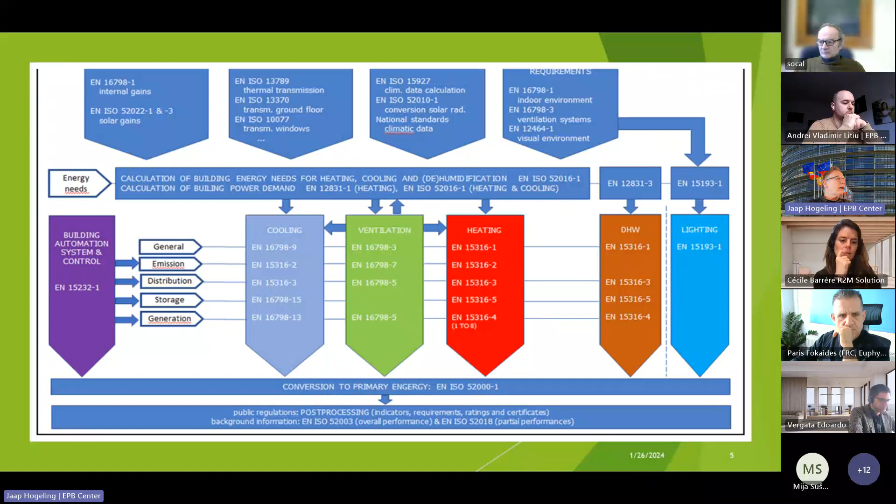Then you calculate according to the overarching standard the primary energy, and then you have the post-processing where the standard EN ISO 52003 plays an important role to describe how it should be looked at - the energy label and the energy certificate of the building.

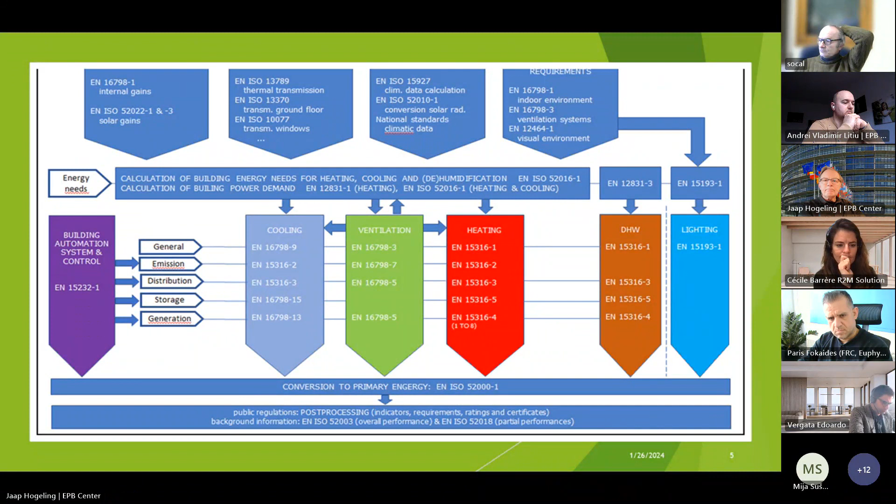Now, I don't see. Okay, yeah.

So the history is that after the EPBD published in 2010, there was further development: cost optimal calculations, and more guidance to ease the process towards nearly zero energy performance of buildings, also introducing the cost optimality procedure by a guideline and regulation from the Commission. That leads to a revised EPBD published in 2018, with more emphasis on cost optimality, NZEB, long-term strategies and smart readiness.

But given the decarbonization goals and the wish to move forward, the Commission decided that this 2018 version should be updated again, leading to the early revision draft in 2021 that will be published now in spring this year.

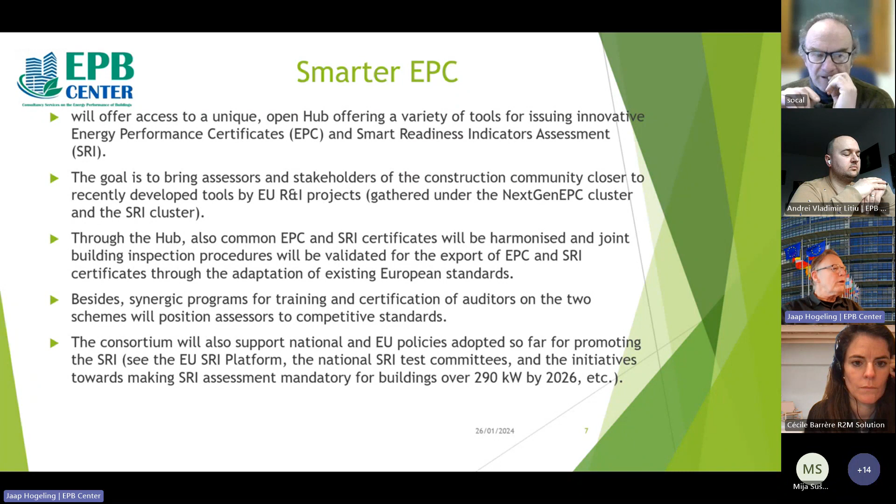The focus is on the energy performance certificate. As I said, in 2010 there were already policy steps towards NZEB and cost optimality, and that was also included in the 2017 standards that were published.

One of the standards is a standard on the energy performance certificate, that is EN 52003-1, and the scope is to set the EPB assessment standards.

The set of EPB standards produces a great number of overall and partial indicators as outputs, and this standard provides general insight to both private parties, public regulators, and all stakeholders involved in this process on how to make use of the outputs for the different purposes.

So it is a post-processing part. The scope describes the relations between the EPB indicators and the requirements and the ratings, and it discusses the importance of project-specific and tailored values as requirement or reference for certain indicators.

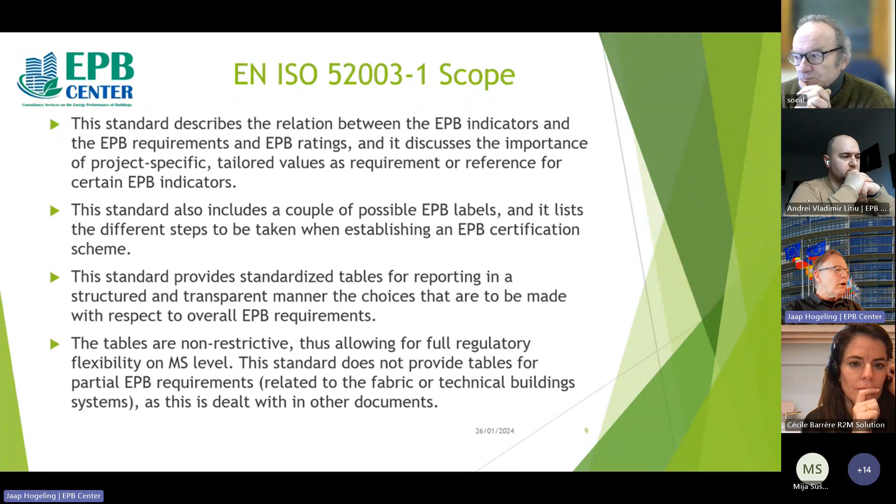It also provides standardized tables for reporting in a transparent manner, but the tables are not restrictive, so it gives you flexibility at member state level on how to make the energy label finally - with the hope that the standard supports harmonization of the energy certificate throughout Europe.

We have to be aware that an energy certificated building requires not only reporting the certificate as such, but also the related input data.

And I give here on this slide a list of input data that should be respected and also put in the database available in connection to the energy label. So you need general data on the type of object, on the building category, on the type of application - why the energy label is produced - and for building permit, for energy audit, for inspection.

The type of assessment - is it calculated, is it measured - and what climate is respected, the outdoor climate and the indoor climate, and details on the assessment tailored for an individual project. You have to report on ventilation, on the overall energy performance, and on the reference size of the object.

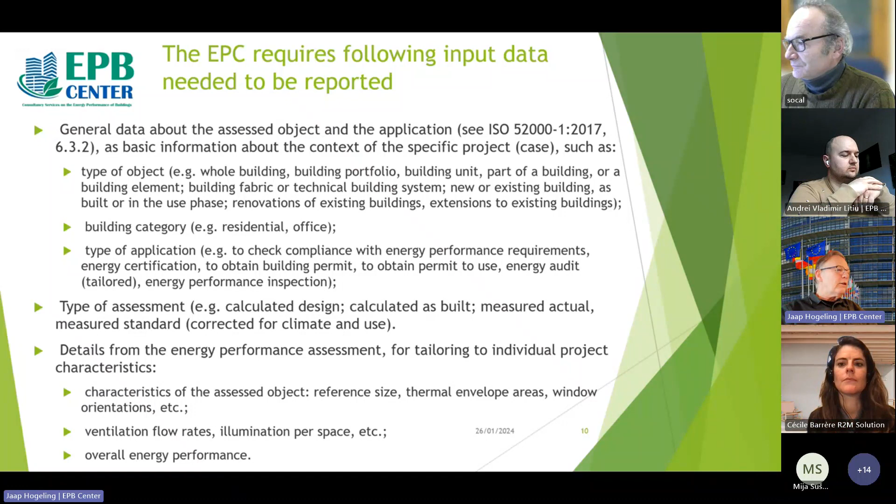If you talk about the assessed object, the building or part of the building or the portfolio of buildings is the object, and you have to be aware that the assessed object comprises all spaces and technical systems. You have to describe this in detail in the database.

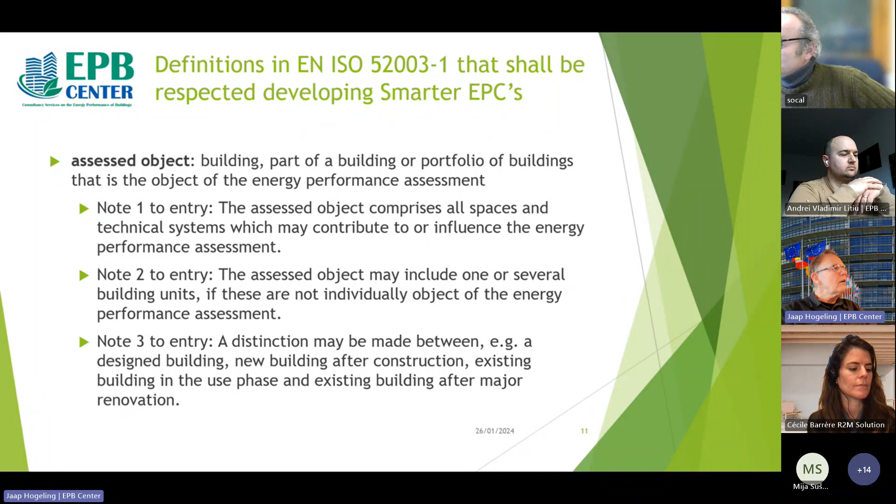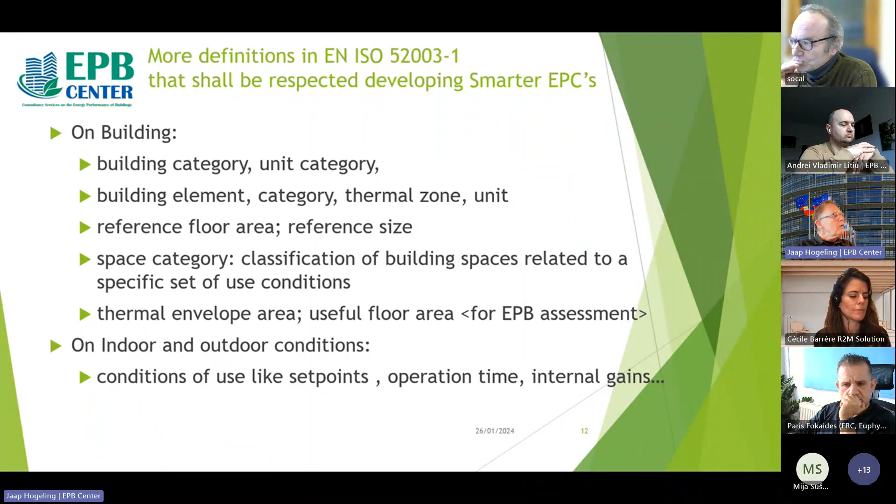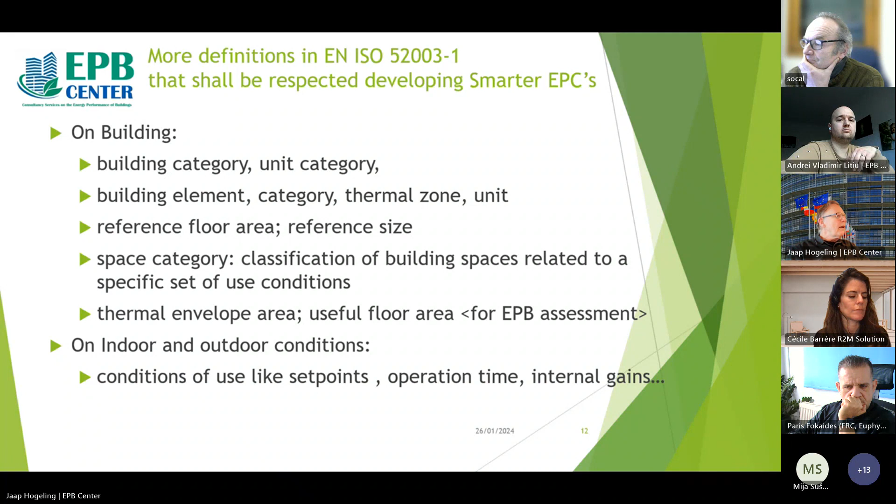There are many definitions in 52003. I just show them here. You have to give clear information about the category, the building elements, the reference floor area, the reference size of the building, because square meters are an important parameter in the energy performance declaration. The space categories are generally very important if you look at the indoor environmental conditions, which have an impact on the energy use. The thermal envelope area, and of course the indoor and outdoor conditions.

Regarding the energy performance, you have to state: is it as built, is it measured, is it calculated, is it a design value, is it a rating on a requirement, or is it a certificate? Are there measured energy values? Is it a numerical indicator of primary energy use? Is the primary energy use per reference floor area, and which is the reference floor area? And do you talk about standard EP or tailored?

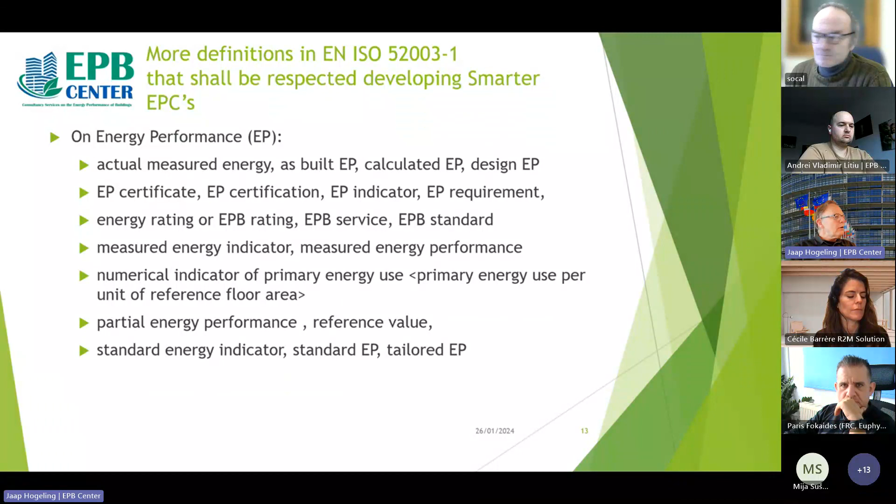Some of the changes in the EPBD that was published in 2010, and also later in 2018, were influenced by delegated acts, and that will again be the case after the publication of the third version of the EPBD this year.

So in the following slides I will give some expectations. As we know, the EPBD is developed because of the Green Deal and other policy papers from the Commission. We have to optimize the building and the system. Energy efficiency first is still the starting point. Decarbonization of the energy carrier and the production of on-site renewables, and the focus on zero energy buildings moves to zero carbon buildings. This is something Laurent Socal will later give more details on.

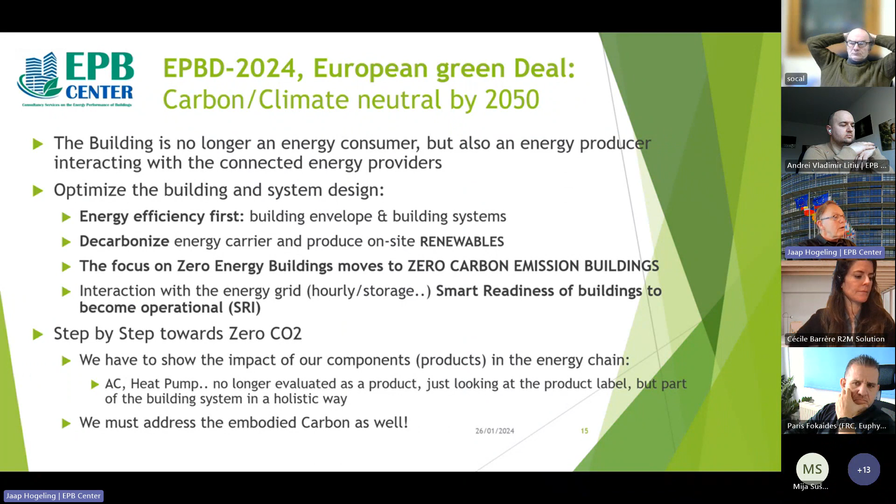And the interaction with the energy grid - is it on an hourly basis, is storage taken into account, and how does the Smart Readiness Indicator play a role in this. Finally, this step slowly during the coming years moves towards zero buildings, zero carbon buildings. And finally, we have to address embodied carbon as well in the near future.

The main new outcome is zero emission buildings and deep renovation programs. So the energy certificate should also indicate how major renovations are expected in the near future, and how it will impact the energy performance of the building. We also have to address the minimum energy performance standards that have to be set on member state level. We hope with this approach that member states will use a harmonized EPC scale.

Hourly calculations are mentioned, but not an obligation. But we see from our side as standard developers that it is essential if we want to decarbonize the buildings.

You could say that non-residential zero emission buildings have to be equipped with control devices to regulate the indoor air quality. Inspections is an issue, and also the certificate, the energy label, is an important instrument to realize the national building renovation plans.

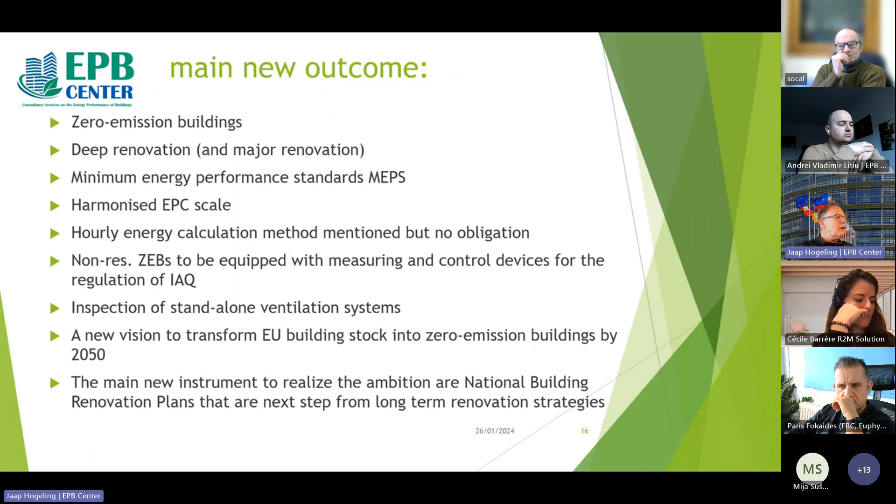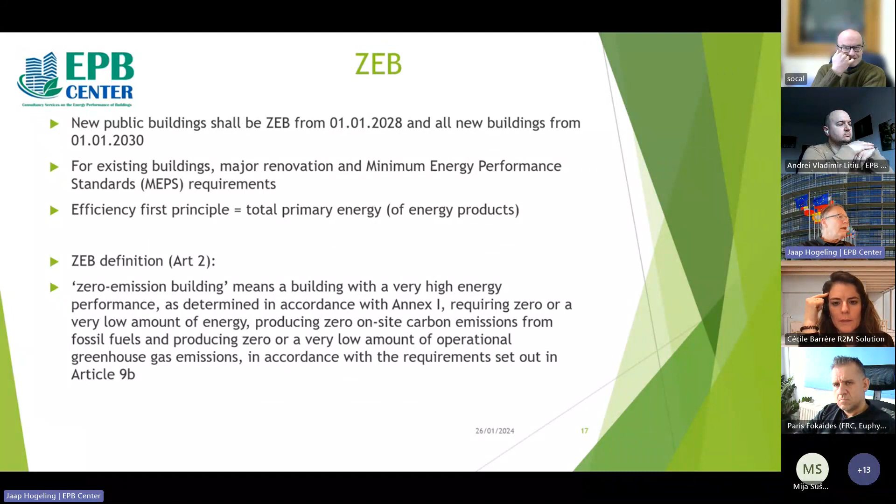These are the requirements in the EPBD on the MEPS and the zero emission buildings, and here the zero emission building definition is given - Laurent will give more information on that. The same in Article 9b, on how the operational thresholds should be considered. A zero emission building shall offer the capacity to react to external signals, so grid interaction, and adapt its energy use, and generation or storage should play a role where economically and technically feasible.

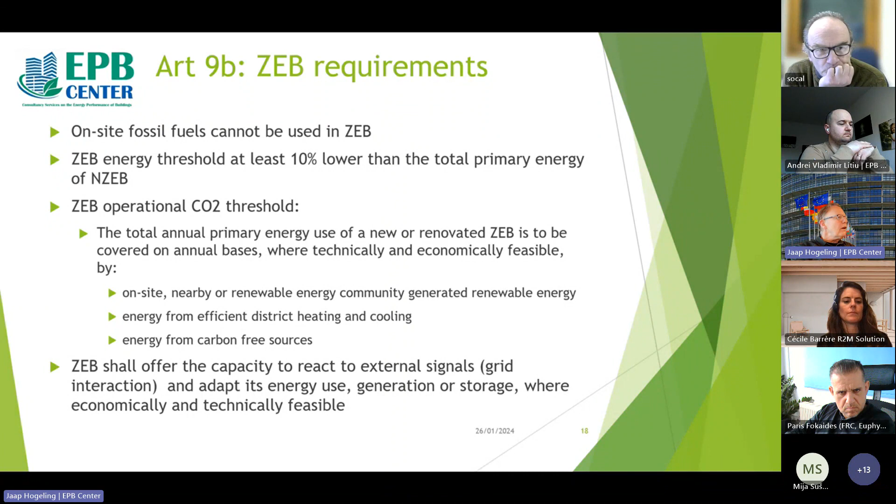That may also have an impact on the energy label and the Smart Readiness Indicator. It is possible to calculate the energy performance value based on total primary energy from delivered energy to the building site, resulting in the same calculation for both non-renewable total primary energy and operational CO2.

But there are different factors, and if you read the EPBD, we have a challenge - we have to, in the coming period, look at our standards, especially the overarching standard, to make the definitions more precise and come to a correct interpretation of the EPBD.

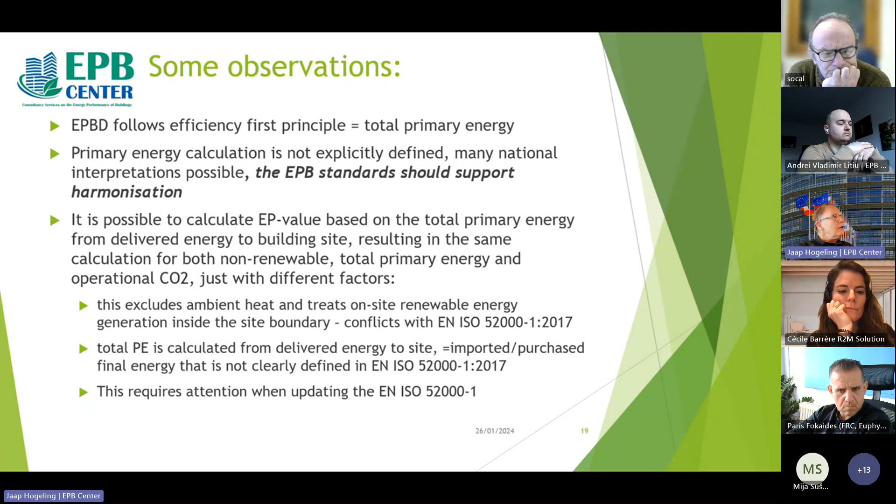Grid interaction, I already mentioned it. It is very important to see how we can also include that in the information on the energy label, because it will impact the outcome of your assessment. It will make a difference if you can really apply grid interaction for your building or not. We will see how this has to be worked out in detail.

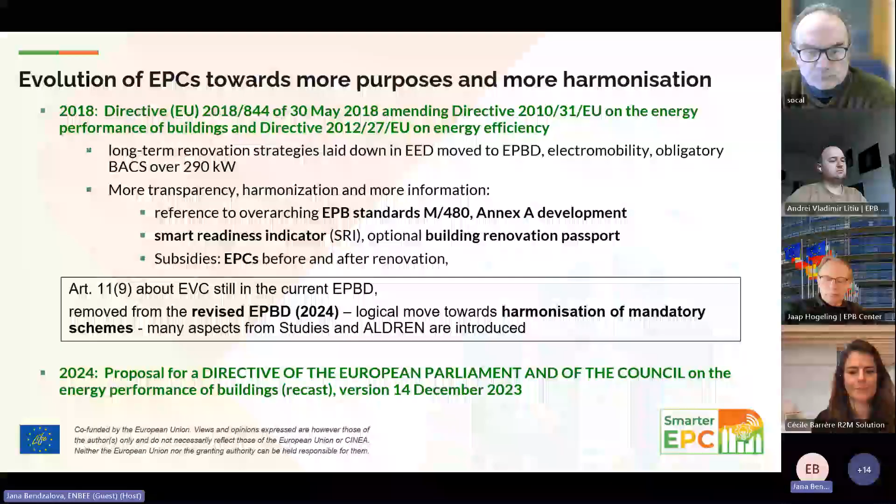So there will be our obligation to implement new directives that I believe is more transparent and harmonized and provides comparable results around Europe.

So I will say now about two projects. It is ALDREN and EPC Recast, which developed several tools that could be perhaps interesting for a Smarter EPC project, because I understand that it will also make link to existing tools and development. So ALDREN, as I said, it was based on voluntary certification scheme, the idea. So 8 European partners worked on this project.

And the aim was to provide transparent, consistent, common European-wide assessment framework to trigger more ambitious renovation and support for common language, EPBD articles implementation, and provide some technical tools and methodologies for implementation of these articles. And so it provides some improved metrics, decision support protocols and tools.

And what was a very important part of ALDREN was that there was an ALDREN Alliance, which was a group of stakeholders, because we tried to find some common language between energy performance and different market actors like financing institutions, asset valuations, comfort and indoor air quality. So there are four main modules or tools in ALDREN.

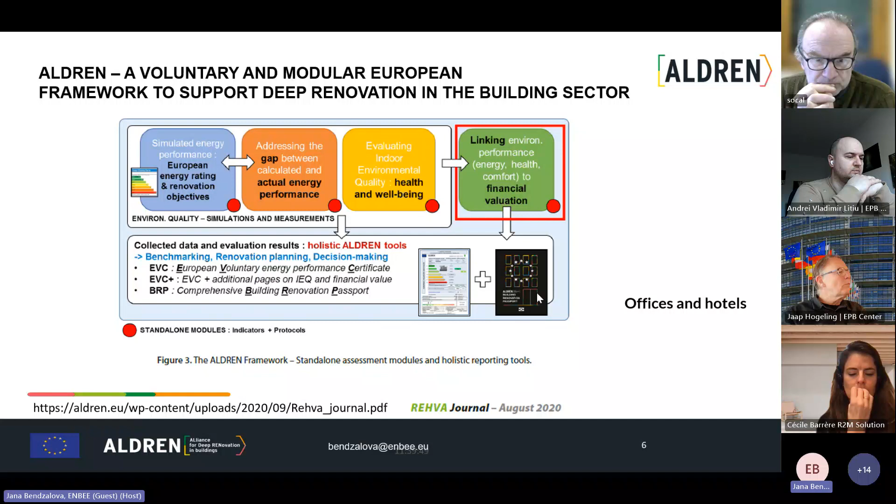And the main outcomes from these modules are energy performance certificate and building renovation passport. So we focus on certificate today because it could be separate presentation about each of these modules. So about the certificate, in ALDREN already were all indicators that are now proposed in revised EPBD.

So there was main indicator, it was non-renewable primary energy at the time, but it contained all indicators that could be useful for some institution, for example, for European green taxonomy and so on. So it included also total primary energy, energy needs, final energy, thermal comfort. It also included measured energy corrected to standard climate and use.

And we had several meetings with existing voluntary certification schemes and also with Level(s) to really provide all indicators that could be used by them, and not only one main indicator that could be decision by member states that energy class will be based on it, but it should provide also other information.

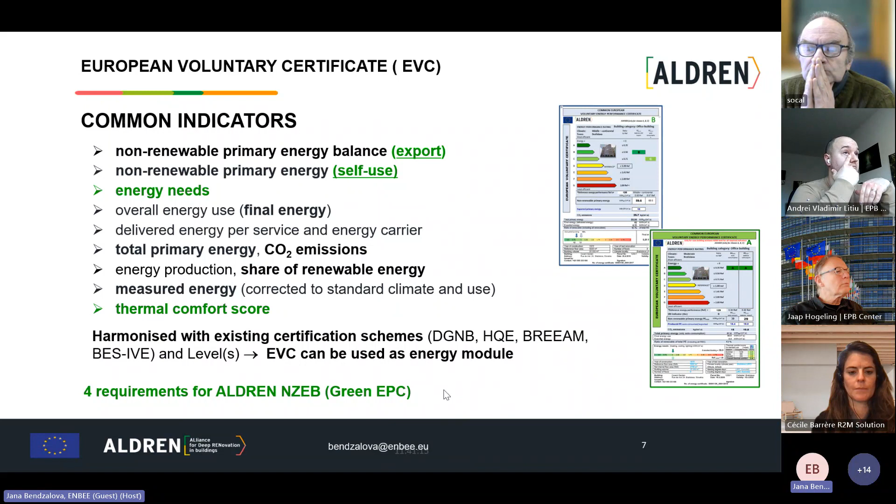There is a common scale, which is now option 2 in European standards that Jaap mentioned. And we also calculated several reference buildings to estimate values for 3 climates. So we made hourly simulations and defined scale for 3 climates. And what is important, we propose that calculations should be for climate of building location, and we recommend to use Joint Research Centre typical meteorological year.

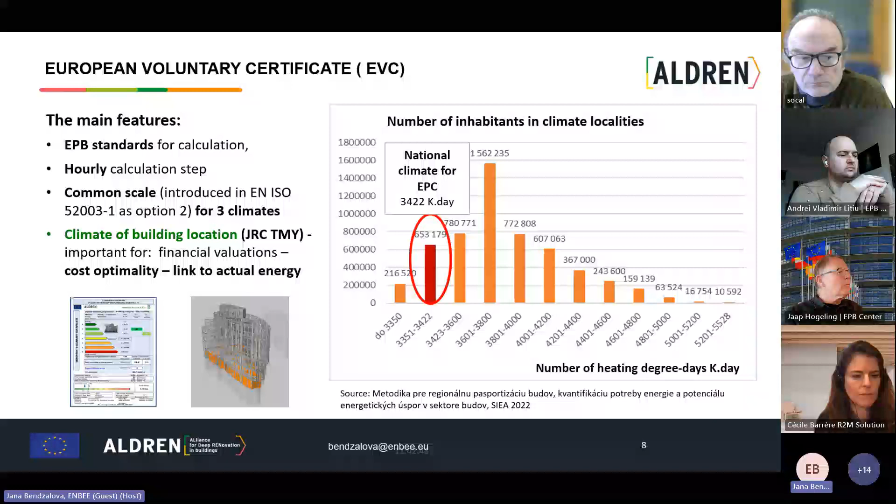And these additional pages include indoor air quality, SRI, financial valuation, risk assessment, and measured energy as a separate reporting page. You can find more about all these modules in the REHVA Journal, because there was a special issue about ALDREN, and I think all these tools are quite well described in this journal.

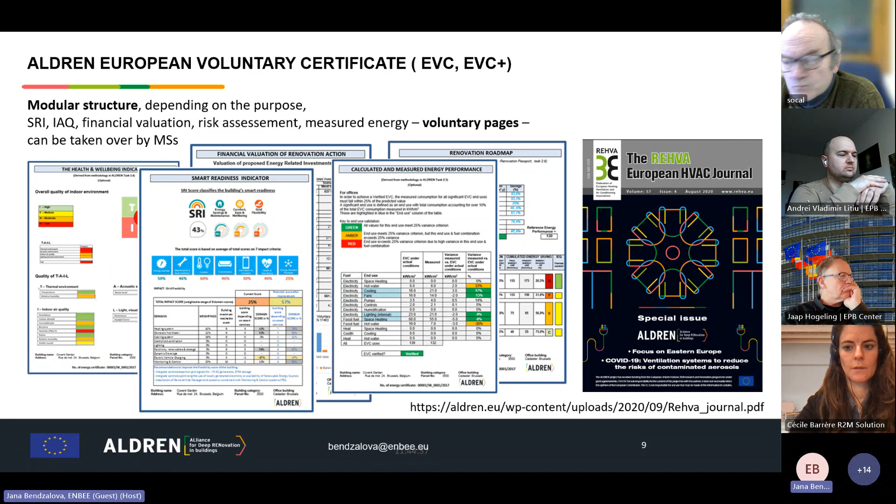So there is a consistency check, data cross-checking during calculations, and comparison with measured energy consumption. It is energy performance model calibration or verification of calculation. And there is also a very important tool, a renovation roadmap.

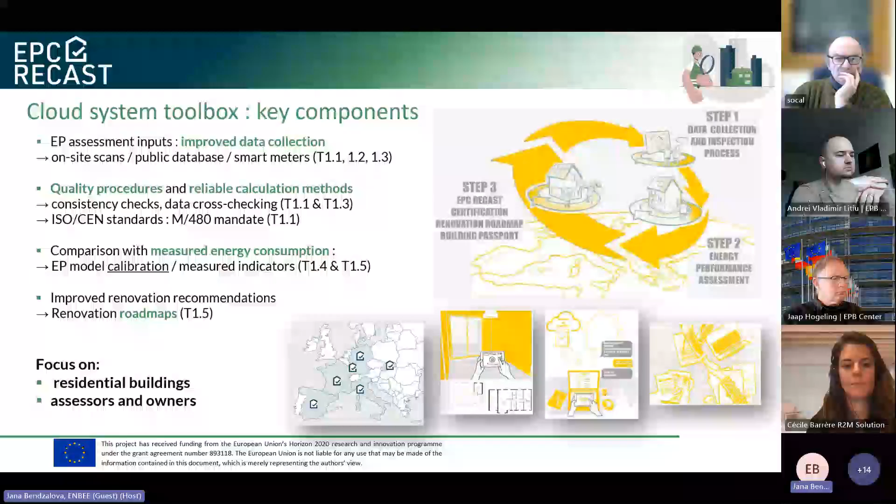ALDREN was focused on hotels and office buildings, and EPC RECAST is focused on residential buildings, and not only on owners, but also on assessors. So we try to help assessors to collect data and to evaluate the building. In this cloud system toolbox, you can find, for example, a link to a tool for scanning the geometry of the building and so on. I must say that not all tools are free, because this is an innovation action and some of them are commercial.

What is very interesting in EPC RECAST is that there is also long-term monitoring of several pilot buildings. So we will have a huge amount of data to compare calculated energy and really measured energy. You can find more on this website about EPC RECAST.

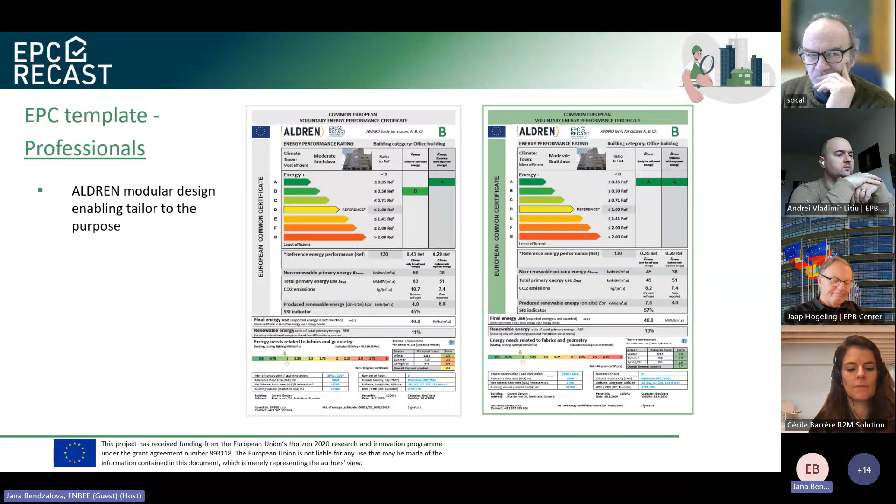About the EPC template in EPC RECAST, we recommend the ALDREN modular design for professionals, but we also developed an owner-tenant EPC, where we try to provide information that is an obligation in the EPBD, including the last version. So it is a template in line with the new EPBD. And we try to motivate the owner to renovate. It is split into the left side, which is the current state, and after renovation on the right side.

Important is that we report all options for key performance indicators for different purposes, so that it also fits the European taxonomy, because the main problem for banks implementing taxonomy is that they have to report energy savings and portfolio performance in total primary energy, but many member states have only non-renewable primary energy as an indicator, including Slovakia. So in these EPCs, they should find all indicators. There is also global warming potential.

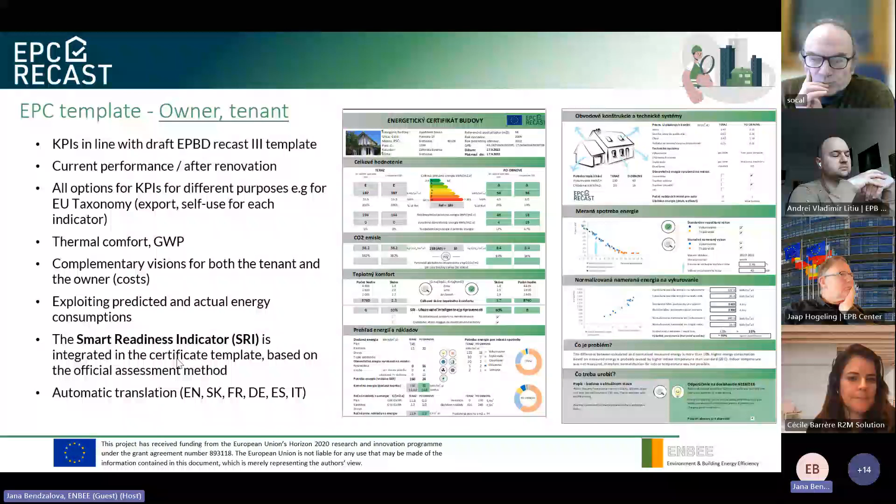In the grant agreement, we had to provide a complementary view for the tenant and the owner, different views. So there is a part about costs. Global costs are more for the owner, and operational costs are more for the tenant. The Smart Readiness Indicator is also reported, but only the result, because we have in the consortium also someone who is an expert on Smart Readiness Indicators. They provided us training, and we recommend using the official tool, but then reporting in the EPC.

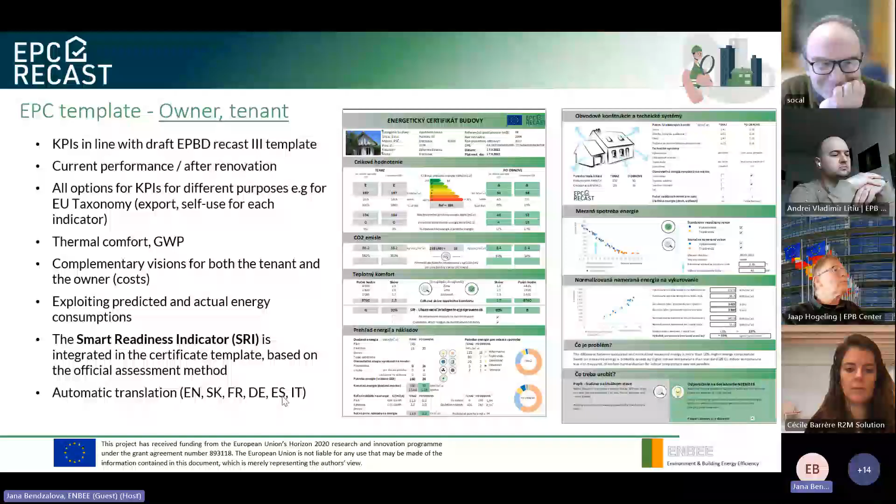It is in Excel, and automatic translation is possible. I apologize, because when I made the print screen, I see that I took Slovak, because it's easy to switch. In the final version, I will put the English version of the EPC.

What is very important, and what I think should always be in each national EPC, is an annex where all the choices for calculation of performance indicators are clear. It is needed not only for transparency and comparability for the Commission or for banks, but also for understanding by the owner, because he should know what is included, if exported PV is counted or not, if ambient heat from the heat pump is counted or not, because I cannot imagine how he can use some value without knowing all this.

So we propose an Excel table with pre-selected answers, because they should be in line with the standards' options and with the options that are used at national level.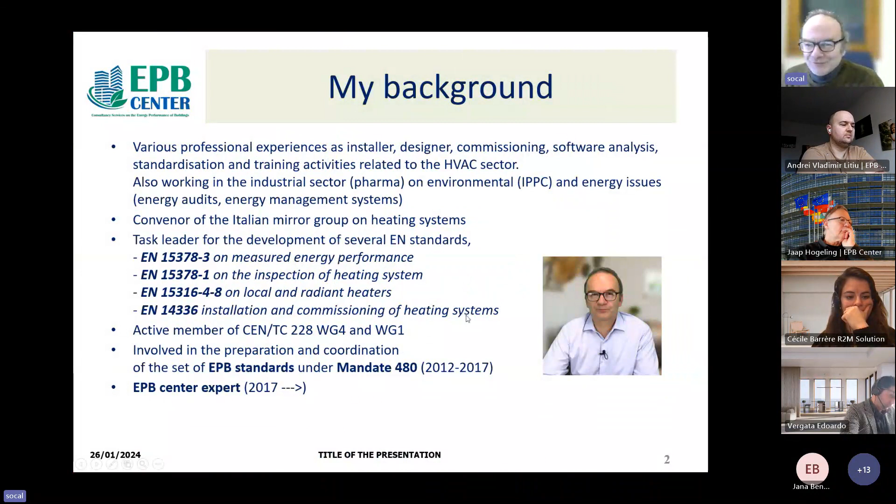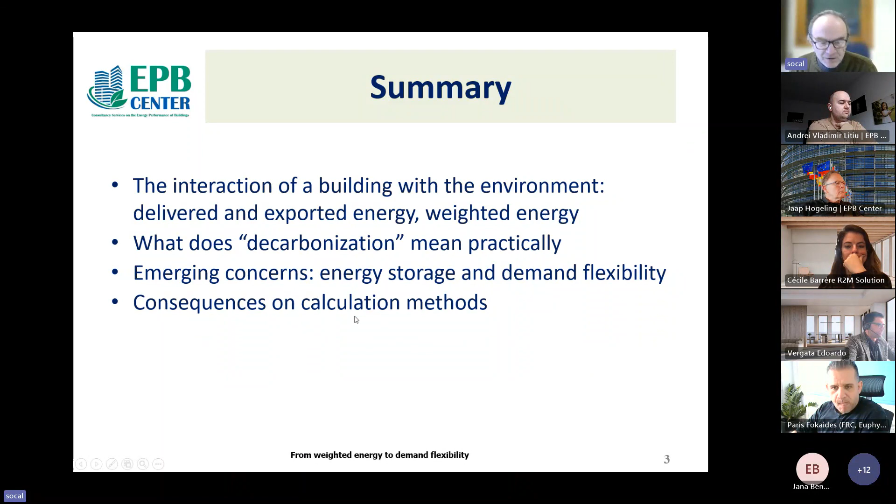And in summary, my presentation will be about the indicators. You need indicators in the EPC, and it is important that we analyze this in detail, the consequences and the relationship with the requirements of decarbonization. We will analyze the interaction of the building, which is through delivered and exported energy. So we need weighted energy to express indicators, and have a look at what decarbonization means in practice, and the emerging concerns, energy storage and demand flexibility, and their relationship with indicators and consequences on calculation methods. So this is what we will do now.

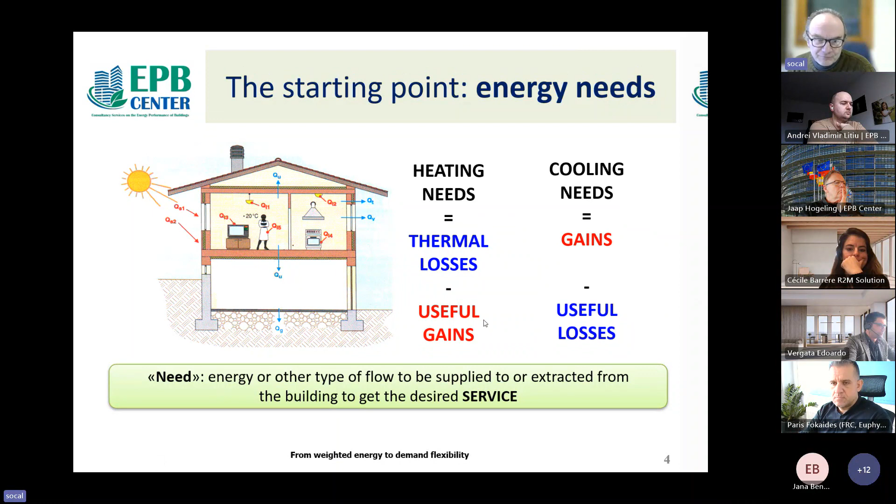So just in short, to remember, the calculation starts from the energy needs, which is the energy which is dependent on the building envelope and on the use of the building. And this is our starting point, energy to be supplied or extracted to provide a building service. You have just an example for heating and cooling, and then a technical system has to supply the needs, and they use electricity, fuel, in general energy carriers, which are supplied through the assessment boundary. This is what we call delivered energy, which in principle is something that can also be metered.

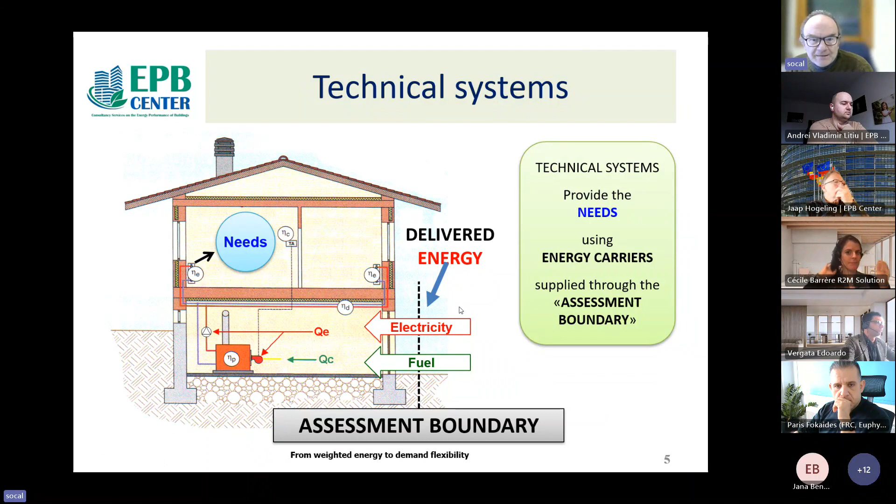But what is the real effect on the environment? It is not what happens here. We can calculate up to the assessment boundary, but what is important for the environment is resource depletion, pollution, greenhouse gas emission, economic costs. So what happens outside the building? This is the question, and this is taken into account by the so-called weighting factors. And here you have a very simple example about primary energy. For example, 1 kilowatt-hour of gas, we have to take something more from a non-renewable source, because we need pumping and we lose some gas on the long road from the well to the building.

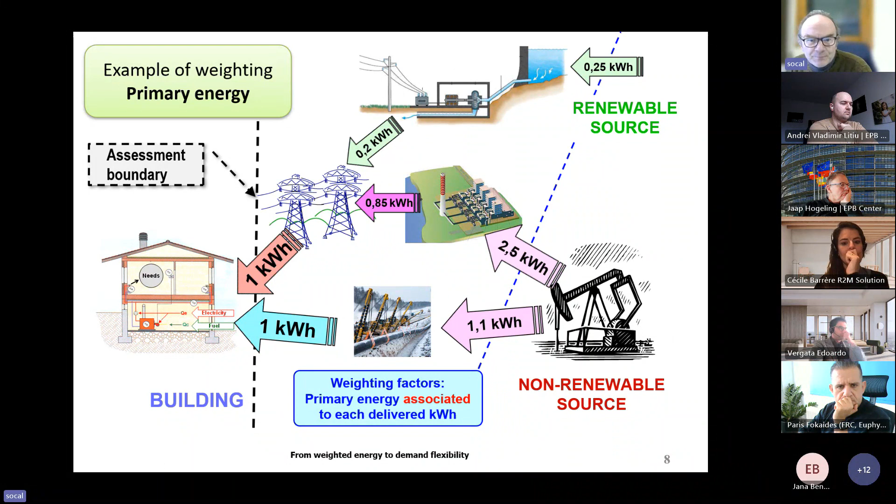For electricity, it's a little bit more complex, because you have both a non-renewable content and a renewable energy content. So you will need two factors, and this will be strongly dependent on how you produce electricity, which depends, of course, on what happens in your nation, in your state. This is a very simple example. So what is the effect on the surrounding environment? We start from the assessment boundary, and we have to weight the energy carriers according to specific cost, a CO2 emission factor, and/or a non-renewable primary energy factor, or renewable or total primary energy factor. It depends on your concern.

By the way, since the concern of the EPBD is shifting from resource depletion, which means non-renewable energy, not to exhaust our energy, to emissions, we now define a zero emission building. Also, the metrics should shift to basically the CO2 emission factor.

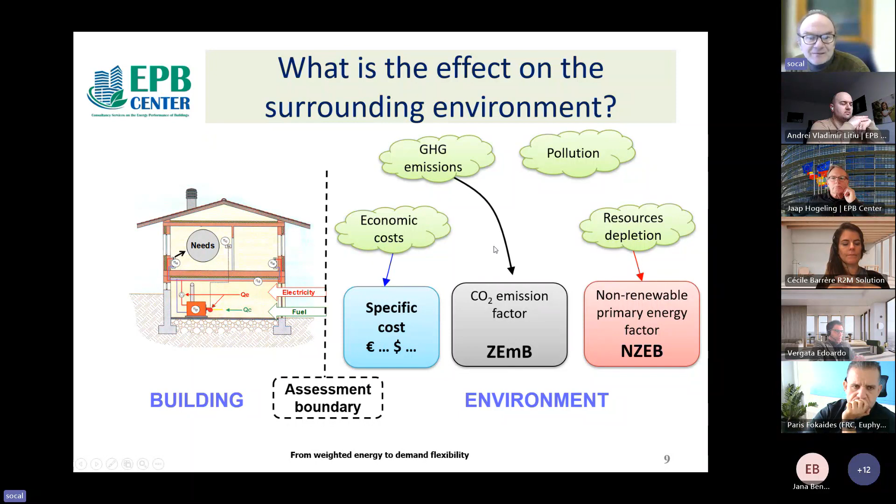And you see this is sneaking in the last version of the draft EPBD. So that's very important in the energy terminology to distinguish the needs at the level of building, usable energy within the building, delivered or exported energy, and different energy carriers cannot be summed as is in kilowatt hour. You have to list them separately.

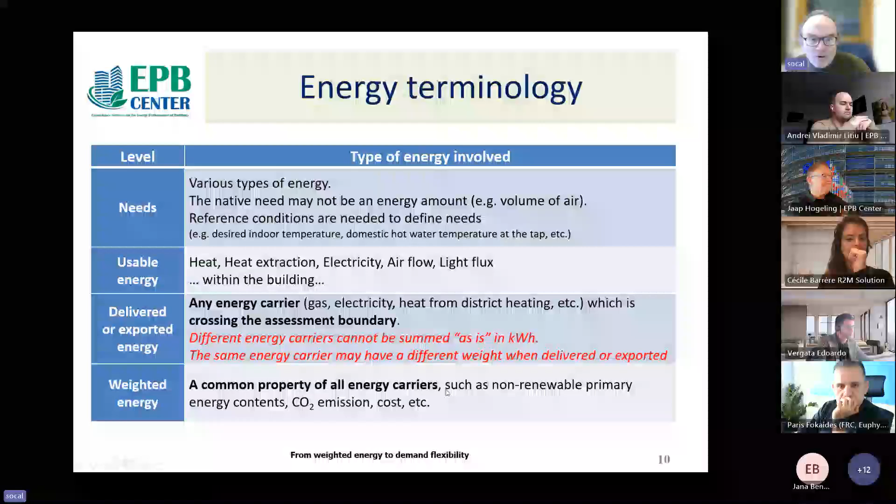If you want to sum apples and pears, you have to use a common property of apples and pears, such as a weight, as a price, or anything else. So that's why then we speak about weighted energy, which is a common property of all energy carriers, so that we can sum them and have one indicator. And here you have a summary of the main weighting factors.

So primary energy, and that's something that should be very clear. Saying primary energy is not a fully defined concept. You have to add whether you are interested in non-renewable, renewable, and total, because this has a different meaning. So primary energy alone is not enough. Otherwise you have mainly the ambiguity between non-renewable and total primary energy. This is a main doubt you might have in reading regulatory documents if this is not specified.

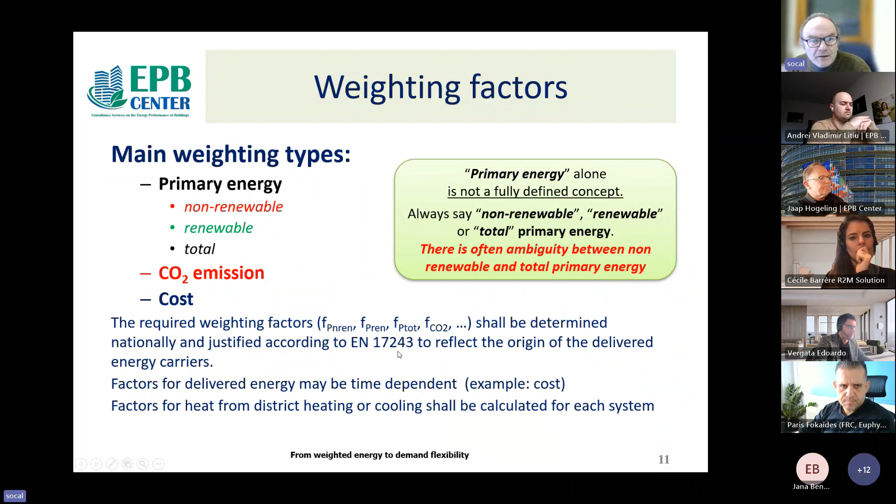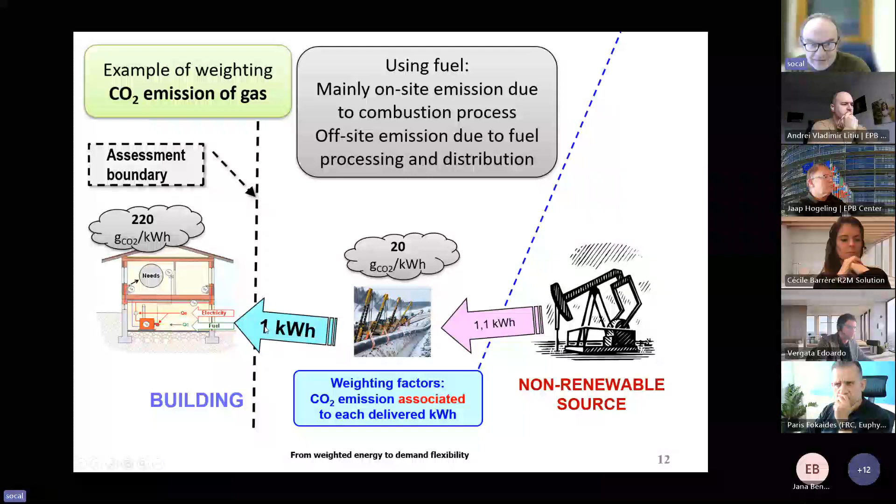But then you have also CO2 emission, costs, and these weighting factors. There are also standards to justify this, also introduced in the new recast EPBD draft. Well, let's have a look at the CO2, for example, which is also interesting. In case of the CO2, two things might happen, because when you are weighting the CO2 emission of gas or a fuel, it's mainly on-site emission due to the combustion process, and something, of course, along the road.

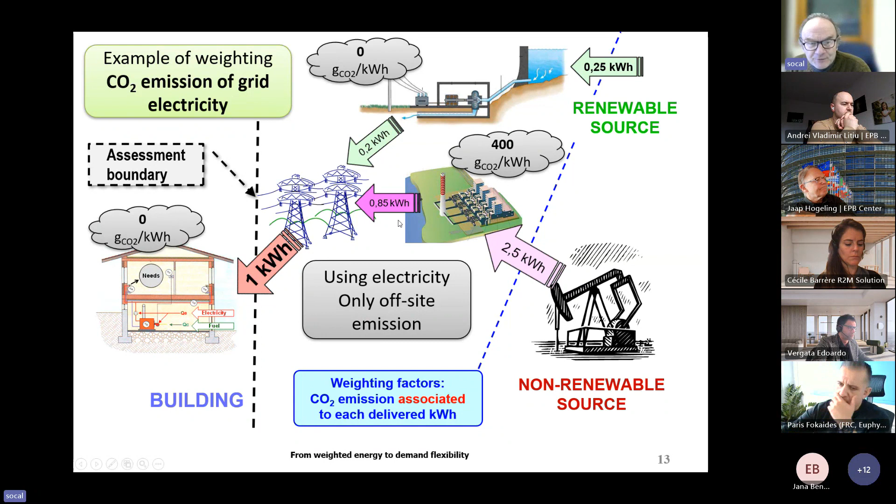On the contrary, if it is a CO2 emission of grid electricity, there is nothing emitted on site, but of course you have CO2 emission right at the production of electricity. So using electricity, you only have off-site emission. I say off-site to mean anything else than on-site. And that's important, this difference between on-site and off-site, because in the latest available definition in the compromise text that was available in December, we are slowly shifting from a zero emission building to a nearly zero emission building.

Because if you look at the definition, a building with a very high performance, which requires zero or a very low amount of energy, zero on-site carbon emission from fossil fuels. And here you have some emission which is sneaking in, because if you use a non-fossil fuel like biomass, then you might have some CO2 emission during the processing of this fuel. And producing zero or very low amount of operational greenhouse gas emissions.

Okay, that's a CO2 emission embedded into the delivered energy carriers, because it's nearly impossible to run a building just with local resources, just like off-grid. So you need to have some amount. And here you can see that really you should say it's a nearly zero emission building, because a little CO2 emission is still allowed, with conditions, but still allowed.

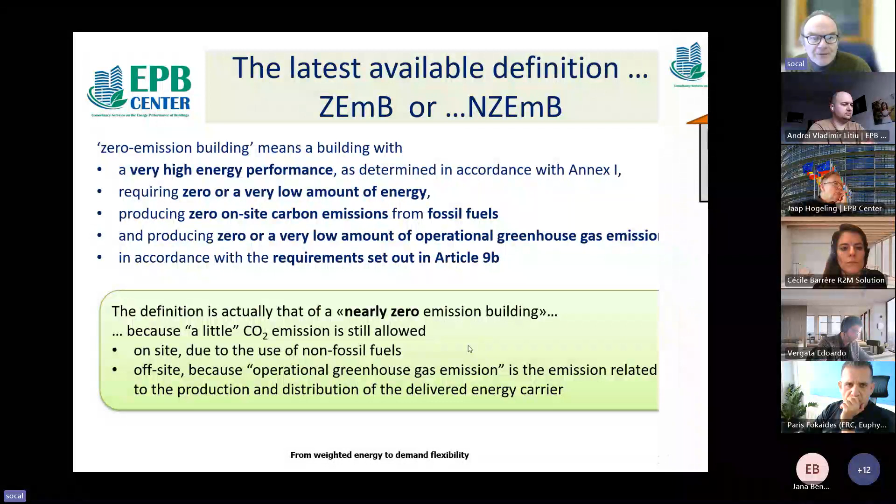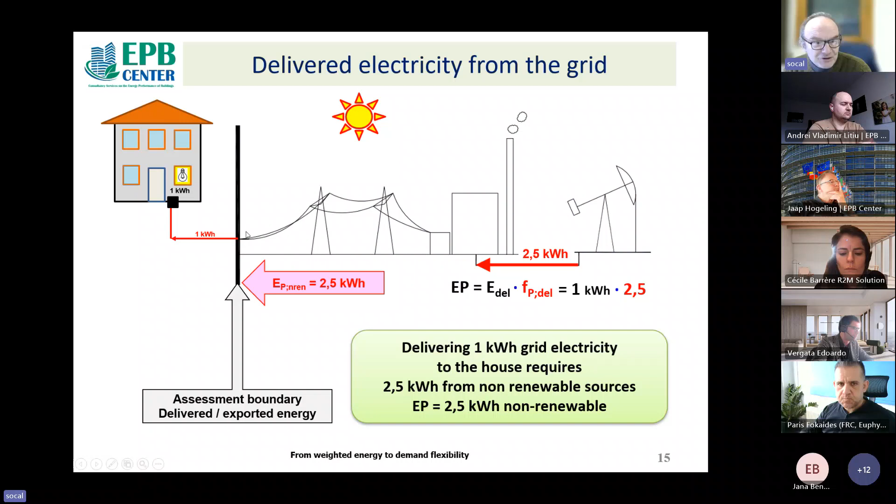Well, until we speak about just delivered energy, everything is quite simple. Delivered electricity from the grid, okay, that's clear. We are using 2.5 kilowatt hours non-renewable for each kilowatt hour delivered. And if we shift to just a PV, it's clear again. It's 1 kilowatt hour renewable in that case, which is feeding our building. So it's very clear. I'm running on renewable sources. Perfect. Through the assessment boundary.

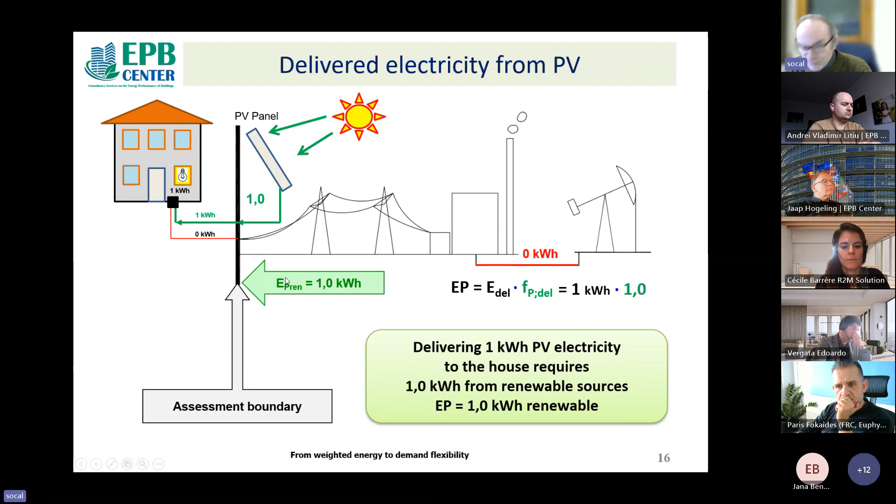But what happens if I turn the lamp off and my PV is still producing? I will export this energy. And now you have a fundamental decision to take. How do you evaluate this kilowatt hour of exported energy? Are you exporting 1 kilowatt hour of renewable energy? Or are you saving the use of 2.5 kilowatt hours by the grid generator? Both options are valid, but you have to select one in making your calculation.

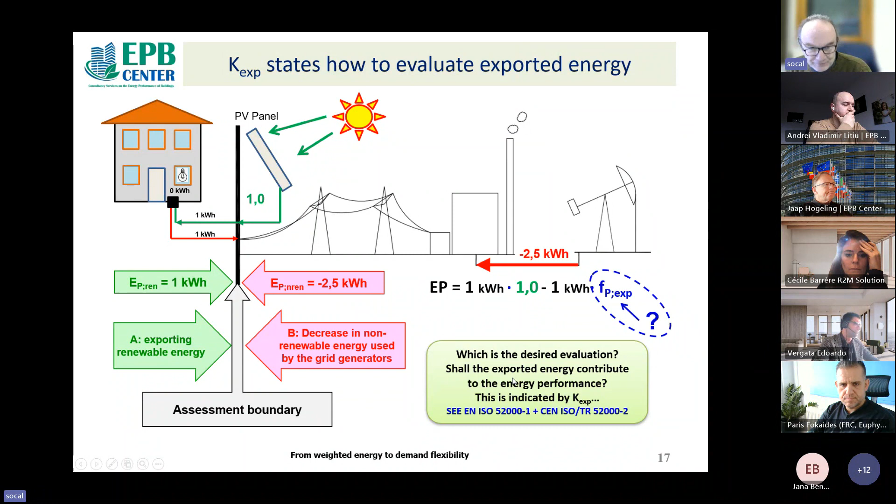And this is a fundamental choice which has deep consequences and is indicated in the EN ISO 52000-1 by a parameter which is K exported. Well, in short, you could say for exported energy, if you use K exported equals 0, then the exported energy is not part of the energy performance of your building. If you choose 1, you are embedding this exported energy into the energy performance. And this choice is a game changer.

For full details, please go to these supporting videos on the EPB Center website. But it is very important that we look at just a simple example, because we want to deal with demand flexibility, but it's already difficult to deal with exported energy currently. So first we have to be very clear about this.

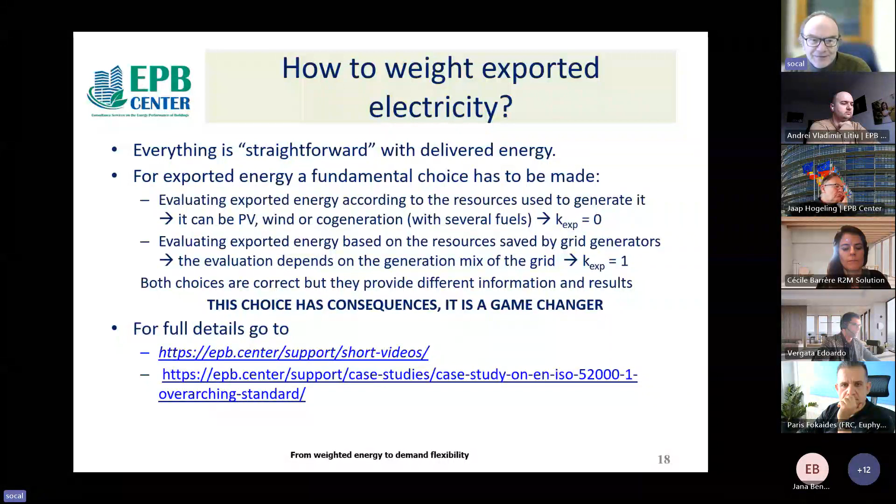And this summarizes how I explain this, including or excluding exported energy from the energy performance, but you have consequences of K exported equal 1. Because if you select K exported equal 1, you will have cross compensation between energy carriers.

You can compensate non-renewable uses by renewable generation, and you compensate between electric energy produced and used at different times. In fact, you are completely obscuring the fact that you might use storage, because you assume that the grid is a perfect battery. So this is not consistent with having to identify the importance of demand flexibility, as we will see later.

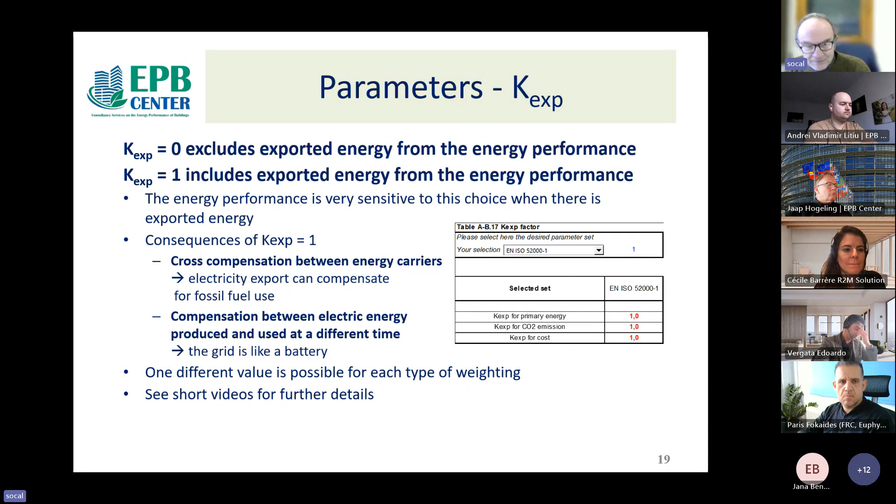And just to illustrate this, this is an example. If you exclude the exported energy, you have here a nice building, very effective, as it looks like, with a very old boiler, and just put on this building some PV. So if you need 15 megawatt-hours of gas and you have enough PV, you might cancel out as a balance. But with K exported equal 0, this is not allowed. This is still a building using gas.

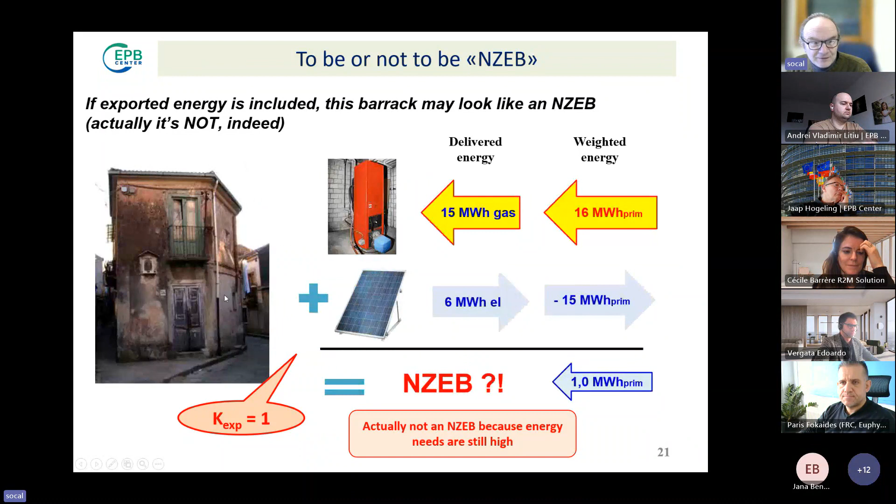And if you use K exported equal 1, in that case, you can cancel out, and this looks like a nearly zero energy building. So here you have an example why just this single parameter is a game changer. The result before was 16 megawatt-hours primary, and in this case it is 1. And this is true both for non-renewable and for total primary energy.

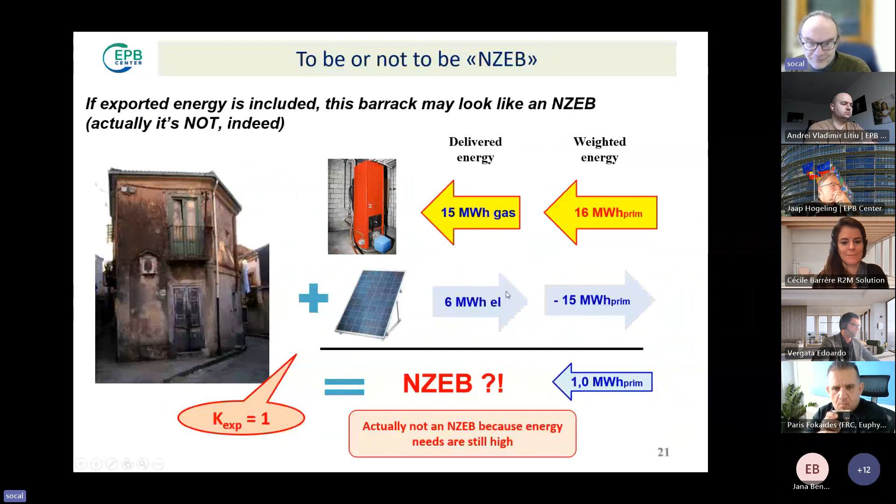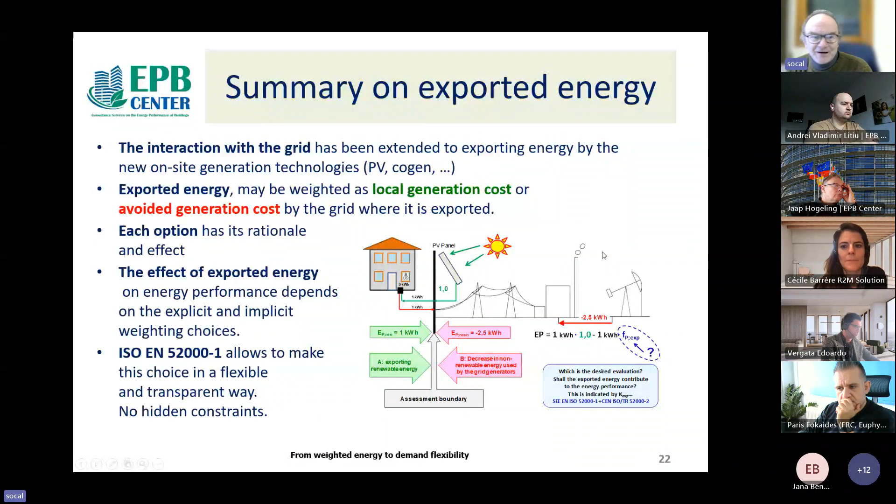Well, here you have just a summary of what I told, so I will skip this slide. You will be able to read on this slide what I just told you on the figures. And now let's come to what's new in the EPBD recast. The new general goal is to decarbonize. So it's zero local emission of new buildings within 2030 and zero emission of existing buildings within 2050, which is quite near. And the focus on life cycle assessment.

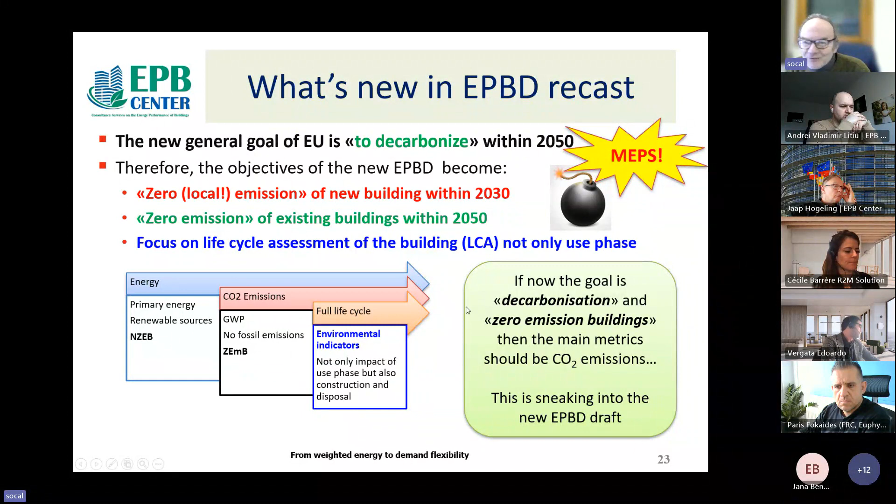So it means first the concern was energy, nearly zero energy building, and now it's CO2 emission and full life cycle. So we should change the metrics, as I told you before. And of course, we will not speak about MEPS, which is probably the most disrupting consequence for the economics. But let's have a look at what decarbonization means.

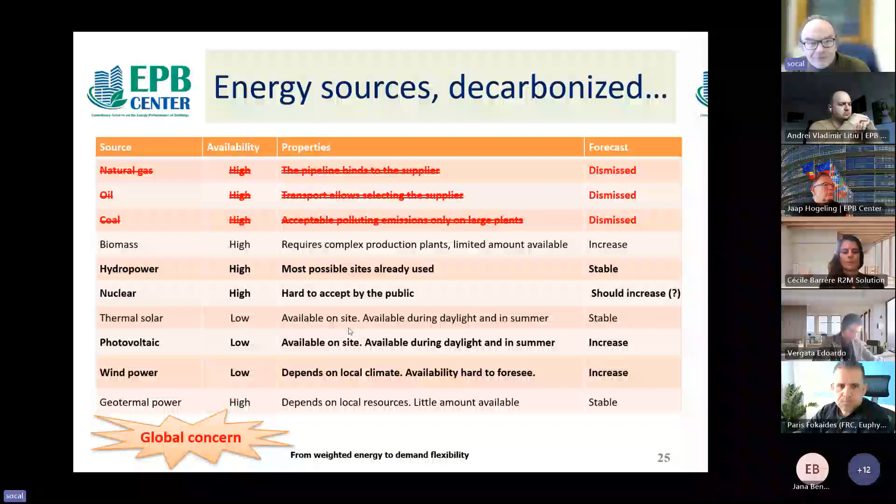And if we want to decarbonize, this means that the first three are dismissed. This is not the topic today, but just imagine having to cover buildings, transport and industry with these remaining sources. It's a big challenge. This is a global concern. But in practice, this also has another consequence for our building, because this applies also to energy carriers, because our building is connected by energy carriers.

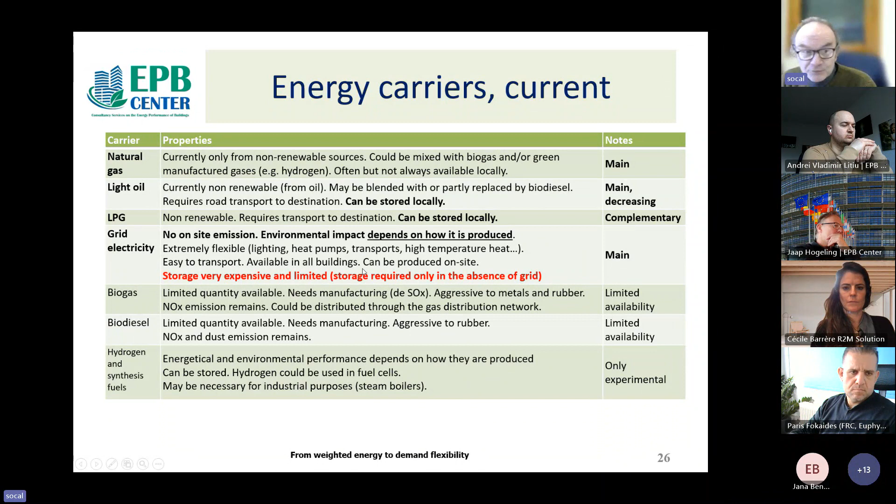No on-site emission, but the environmental impact depends on how it is produced. And the storage is very expensive and limited. This is one limit of electricity currently. And if we want to decarbonize, and this is a consequence for our buildings, these energy carriers are no more available. So we have to rely on grid electricity plus something like biogas and biodiesel.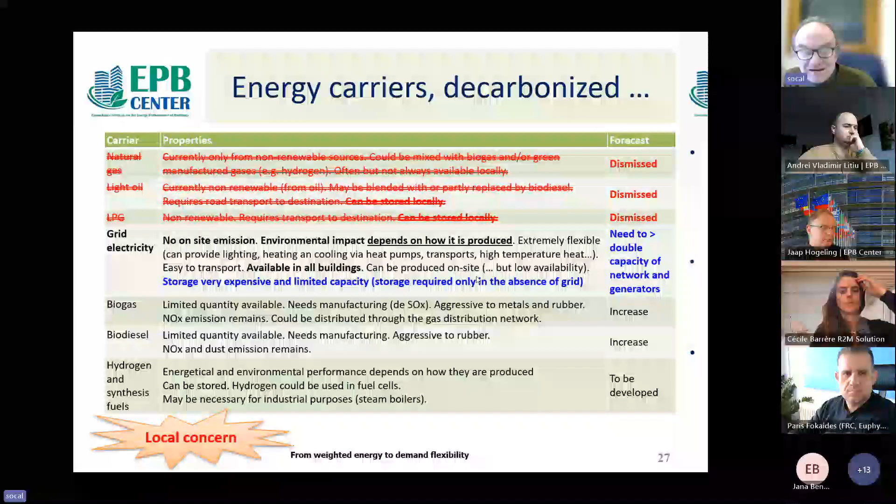And this is a long road, because you can see this is a very interesting app, and you can see nowadays which is the current carbon intensity of electricity in the European countries. Actually, this app covers the entire world, so you can have an idea of the global situation.

And of course, if we want to run on electricity, we have to find the sources, but we have also to reduce energy use. Otherwise, the grid will have issues. That's why it's important that we reduce also the energy use in total. And the grid itself is an instantaneous equilibrium of use and generation. There is no storage capacity in the grid.

So that's why there is a help needed, which is demand flexibility. And that's the reason why we have demand flexibility, because the sources that we will have to use are not available. So we have to do something to ask for energy at the right time. Otherwise, it doesn't work. And here you can see if you put another weight on this, what can happen. That's very interesting to have a look here.

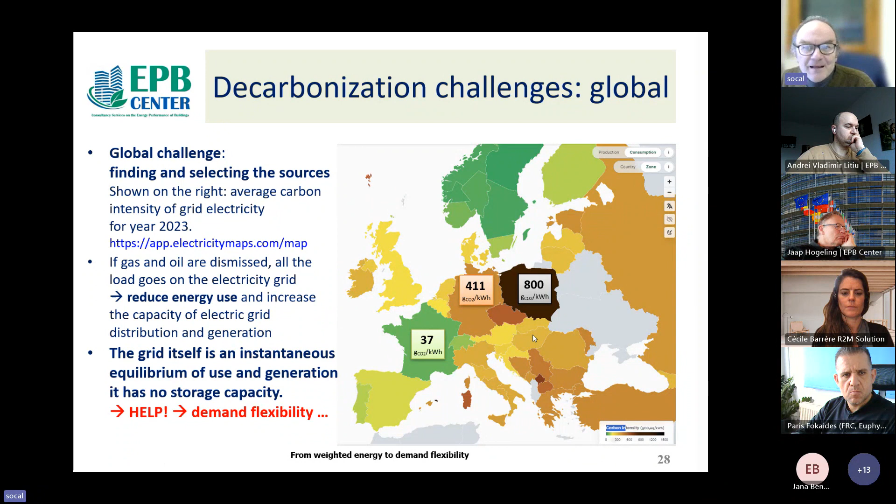So the local decarbonization challenge is now to shift to electric heating heat pumps. And I already mentioned the reduction of energy demand and peak power, that means insulating buildings, and local production of energy, which will be mostly PV, but it's limited by the available area, the building footprint, and you have to contribute to grid stability. Well, the smart grid, it will not be so smart for the building, because you will get two signals: don't use energy from the grid, or use energy from the grid, depending on availability. In other words, to do this, you have to store energy into your building. That's why, in turn, it is very important we have a look at what happens.

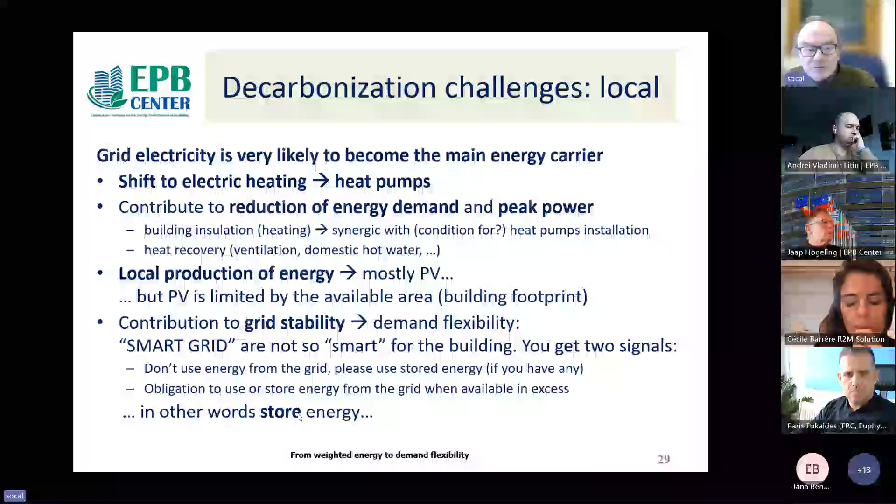And here is another example of the importance of availability and the meaning of K exported. This is a trivial example where you have a production in one day, which is 18 kilowatt hours, and you need 18 kilowatt hours for your building. But this is a profile during the day. And you will see that, of course, PV will come during the day, whilst you need still some electricity also during the night. Even if you are full electric, here you are loading probably your storage for domestic hot water. Here you need also something to run your fridge or other things. And so you need electricity indeed.

So if you do an evaluation, here you have two different approaches to evaluate the degree of contribution of the PV. You can say that you have a coverage of 31%. It means that you had the PV at the right moment, the green part. And then you have also this excess PV that may compensate the required electricity during the night. This is compensation. So you could say here we have 100% compensation and 31% coverage.

When you are calculating with K exported equals 0, you are calculating the coverage. If you calculate with K exported equal 1, you are calculating the compensated value. So you can see here, and to increase coverage, which obviously is the objective, because here you rely on the grid, and in turn the grid relies on something else, you may alternatively either move energy use over time. So you could, for example, tell your storage, please reload during the day, store electricity on a battery, or store heat in the building and/or in the system. So you can use this to improve your diagram.

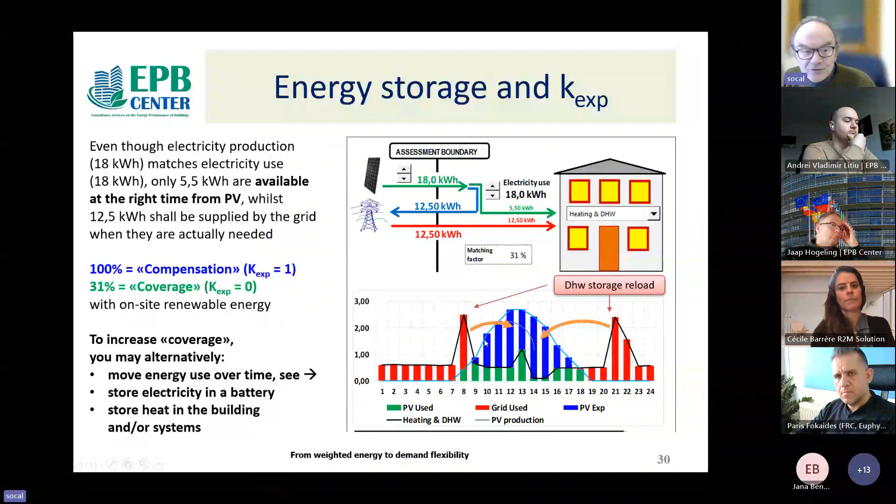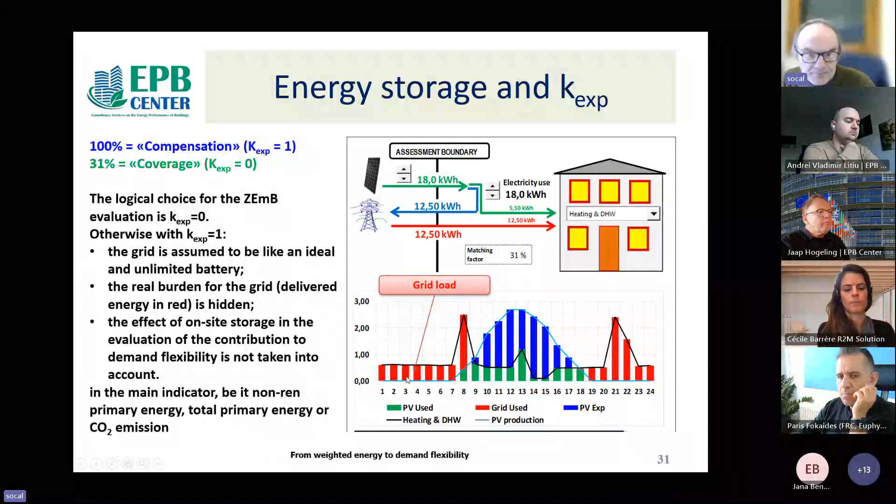And okay, if you use, of course, the logical choice for the zero emission building in that case is K exported equals 0, because if you use K exported equal 1, the grid is assumed to be an ideal and unlimited battery, and you hide the real burden for the grid. And the effect of on-site storage in the evaluation and of the electric system efficiency will be completely obscured in the main indicator. So that's why I think that the correct choice for this coefficient is K exported equals 0 in this new context. And here you probably know this picture. It means that we will have to evaluate.

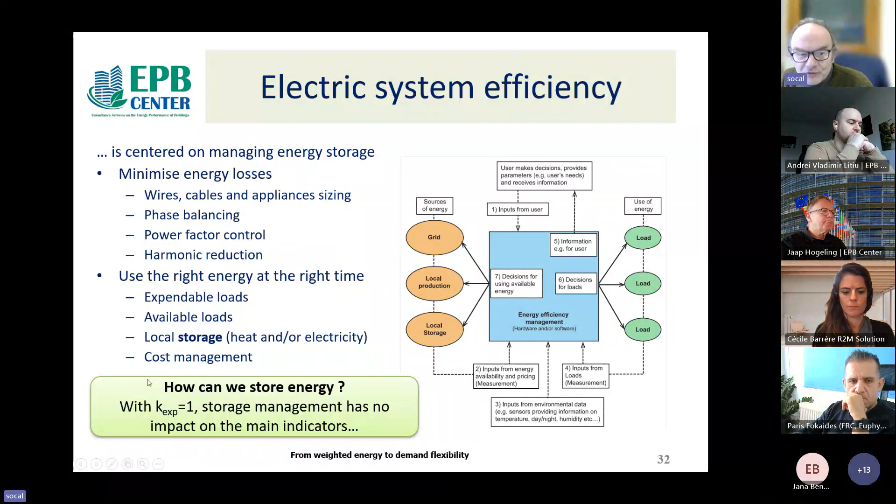This will be part of the new EPC, the evaluation of the electric system efficiency. And of course, this is a lot about using local storage. If you use K exported equal 1, the storage management has no impact on the main indicators. So that's another reason why the choice could be K exported equal 0.

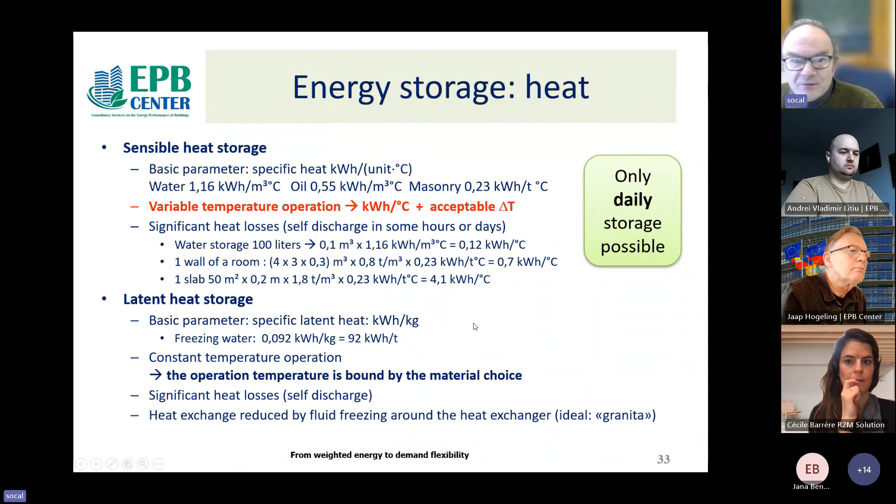For electricity storage, here you have another important concept. If you compare electricity storage by batteries and chemical storage, currently there is no match. Just an example for cars: this is power which is actually available when you reload the battery. With electricity, you are about 100 kilowatts, but when you are filling your tank at the gas station, it's 21 megawatts, the power at which you refill. So here, really no match.

And also the cost of the battery. Here you have the comparison of two equivalent things. This is a battery for a Tesla, 75 kilowatt hours. This is the price, and this is the equivalent in chemical. And this is to show that only chemistry can provide seasonal storage. That's an interesting property of synthetic fuels. So that's why you might go through chemistry, and you might still have a requirement to have synthetic fuels just to overcome the problem of seasonal storage.

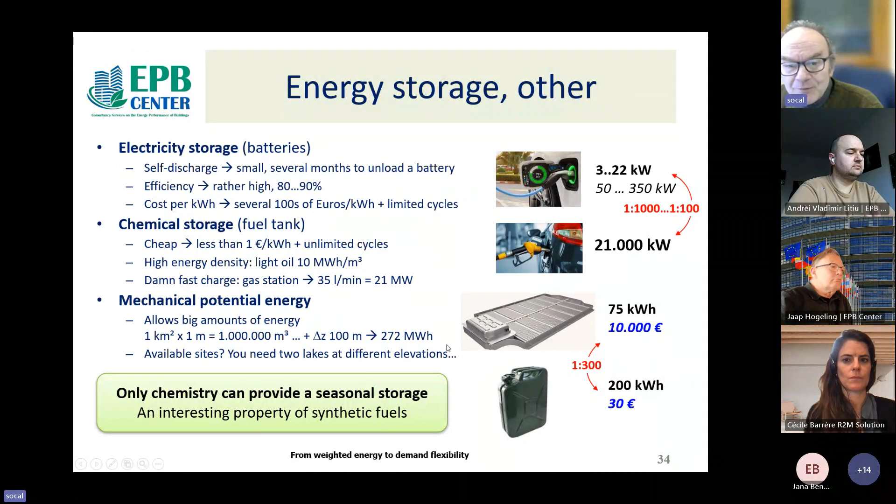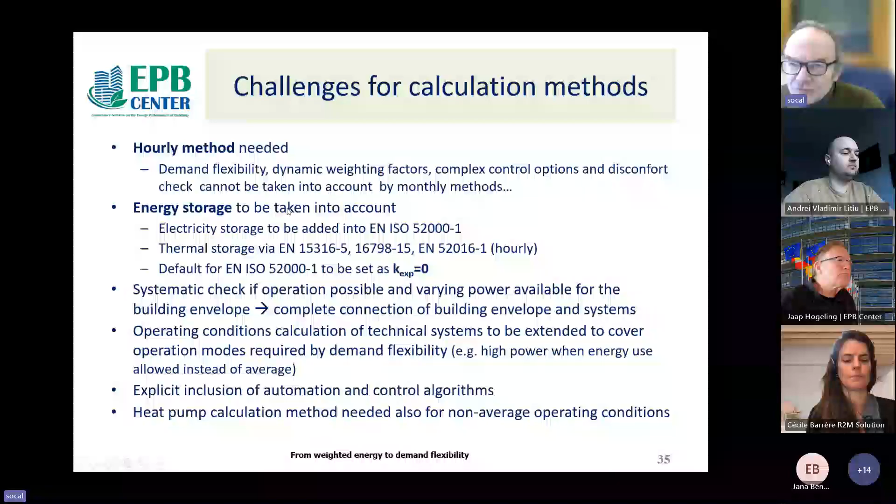Otherwise, it's quite difficult. Now, challenges for calculation methods. Of course, the last recast still leaves open monthly calculation methods. I think there is no story here. If you want to incorporate demand flexibility, dynamic weighting factors, complex control options, discomfort, there's no possibility to do this with monthly methods. So it shall be hourly methods.

And of course, we have to introduce energy storage, which means adding this in 52000-1. That's quite simple. Thermal storage is already foreseen in these other standards, and of course even in 52016, because you can take into account the effect of overheating your building to store energy. I think we have to set this by default, otherwise you are masking all interaction with the grid.

And also some completion, especially on the structure of the calculation, to deal with operation possibilities. The operating condition calculation of technical systems has to be extended to cover the operation modes required by demand flexibility, because in that case you cannot assume just an average operation mode. You need to recover after not being allowed to use energy for some time because of the smart grid, and there's explicit inclusion of automation and control algorithms needed, because this has to be taken into account to evaluate the behavior of the whole system. And that also has consequences, of course, very specific for heat pump calculation methods.

In conclusion, we have gone through some decarbonization issues. The first is providing a mix of energy sources that is able to cover buildings, industry, and transport energy demand when needed, and that's the point. And providing seasonal energy storage—PV without seasonal energy storage has no chance to contribute significantly to the need at the right time.

Increasing the electricity grid distribution generation capacity, or providing mass production of synthetic green fuels—otherwise you cannot transport the energy to your customers—and reducing building energy use in terms of energy and power demand. This means insulation, heat recovery, energy efficiency, which is also helpful to use heat pumps as well. And designing, installing, and commissioning complex technical systems, much more complex than what we were used to in the past, and adapting calculation methods and regulations.

In my opinion, this will be very interesting technically, but neither easy nor for free. It will cost something. Well, maybe it's worth paying the cost, but it has to be paid. Otherwise, you can't do all these things just for free.